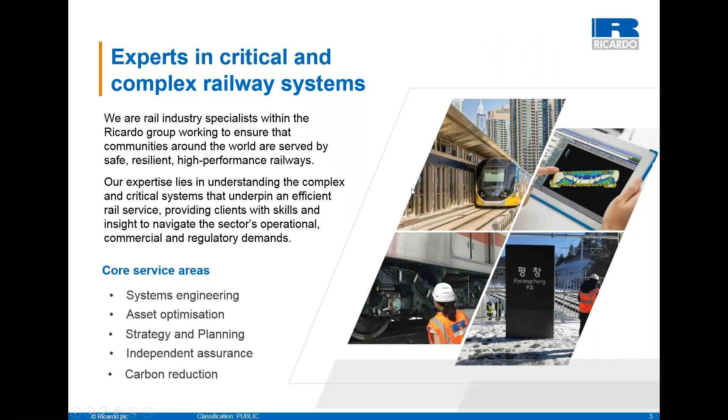So can the negatives outweigh the positives? Couple of quick slides about Ricardo. Experts in critical and complex railway systems and projects across the world.

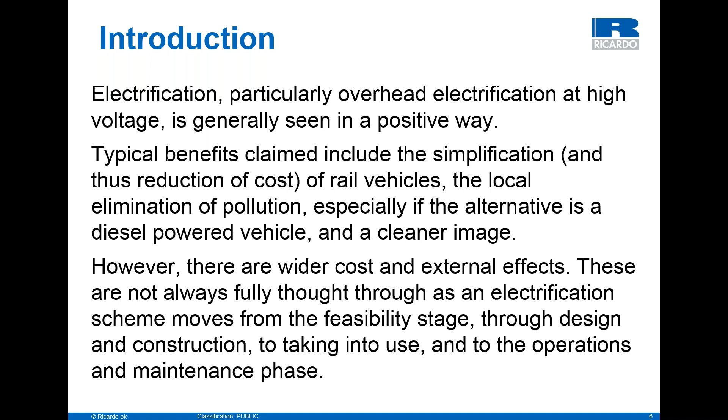However, there are wider cost and external effects. These are not always fully thought through as an electrification scheme moves from the feasibility stage through design and construction to taking into use and to the operations and maintenance phase. So looking first at implementation issues.

Typically, physical implementation requires significant disruption to train services over months, if not years. This can destroy the rail market on the route and thus potentially electrification's own business case. For example, electrification of the Cross-City line in Birmingham required the suspension of evening and weekend services, forcing passengers to use alternative modes of transport.

As the electrification works coincided with a recession, those other modes were not crowded, and there was a degree of modal shift away from the railway that took a long time to recover.

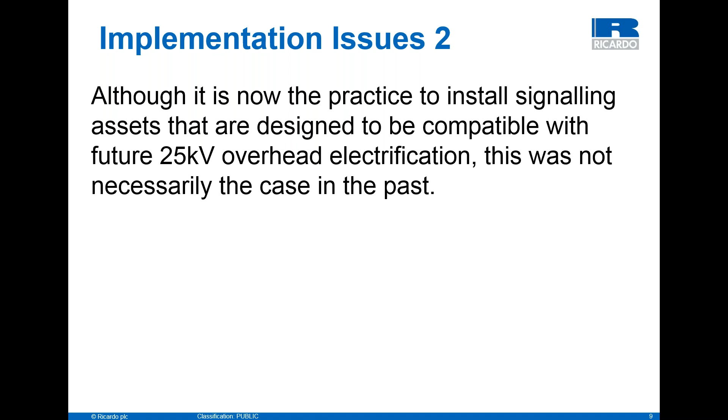Although it is now the practice to install signalling assets that are designed to be compatible with future 25 kV overhead electrification, this was not necessarily the case in the past. Therefore, where electrification does not coincide with resignalling, there can be a significant amount of work for the immunization of the existing signalling, including, in particular, changes to track circuits.

The design life of a bridge is typically of the order of 100 to 120 years. Some forms of bridge, such as brick and masonry arches, can, if the foundations are not disturbed, last much longer. When electrification requires the reconstruction of bridges, it has to be recognized that there is a cost in environmental terms of destroying bridges with decades of remaining life.

There does seem to be some potential for a former practice. The London Brighton and South Coast Railway electrified much of its suburban service in the early years of the 20th century, using a 6.7 kilovolt AC overhead system. To avoid reconstructing certain bridges, there were dead lengths of contact wire.

This concept is now being promoted as an innovation, although recent experience seems limited. The trains could deal with quite a long dead section. Up to 60 metres is recorded in Hamilton Ellis's The London Brighton and South Coast Railway.

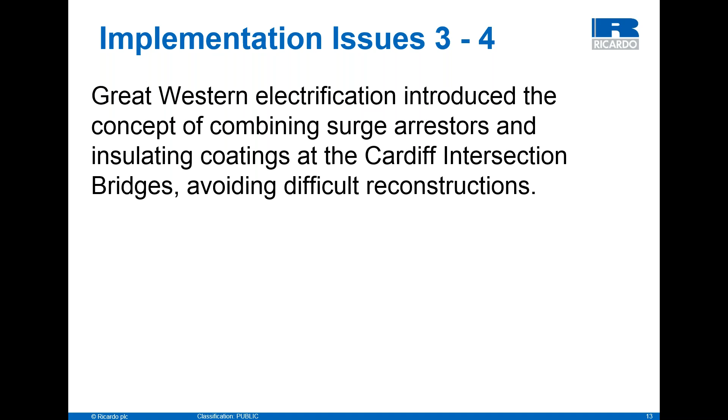Great Western electrification introduced the concept of combining surge arresters and insulating coatings at the Cardiff intersection bridges, avoiding difficult reconstructions. It will be interesting to see how the coatings perform over the years and how often they have to be refreshed. In that context, there is also a need to ensure that the insulating coating or an equivalent remains on the market.

So one alternative to bridge reconstruction is track lowering. Where, as is often the case with older bridges, the abutment design relies on the presence of passive earth pressure on the lower face of the abutment for stability, the abutment needs to be underpinned. Unfortunately, there is usually also a need to modify the drainage to avoid the creation of a sump. And track lowering adversely affects the track top profile.

And on a higher speed line, there is a need for long run-ins and run-outs to comply with the relevant design parameters and to avoid the creation of a permanent speed restriction. This work inevitably requires possessions longer than the maintenance white periods and, not infrequently, temporary speed restrictions whilst the new track profile is created. As with bridges, there is a cost in environmental terms of changing an existing asset configuration with remaining life and generating ballast and track waste.

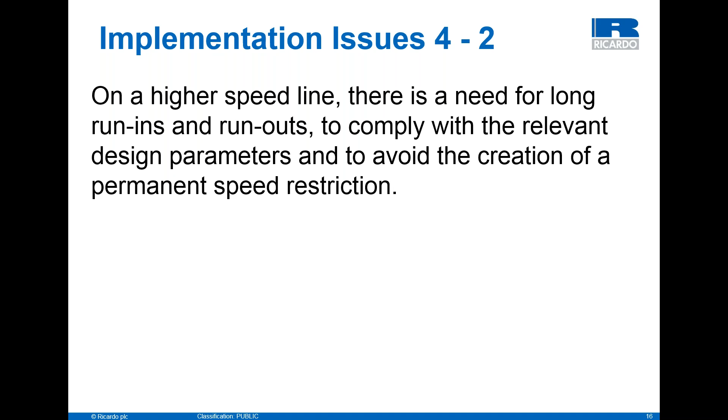A second alternative to bridge reconstruction is the installation of a track slab, common where there is a tunnel or a succession of bridges. It is rare that construction of slab track does not require a blockade of the track, for a period more likely to be measured in weeks rather than days. In addition, the construction of transitions between track slabs and ballasted track can be problematic in terms of quality control.

Electrification also requires a significant earthing and bonding exercise. It is necessary to consider all existing metal structures, including footbridges, line-side fences, station furniture, etc. At metal bridges, the risk of dangerous touch potentials must be eliminated.

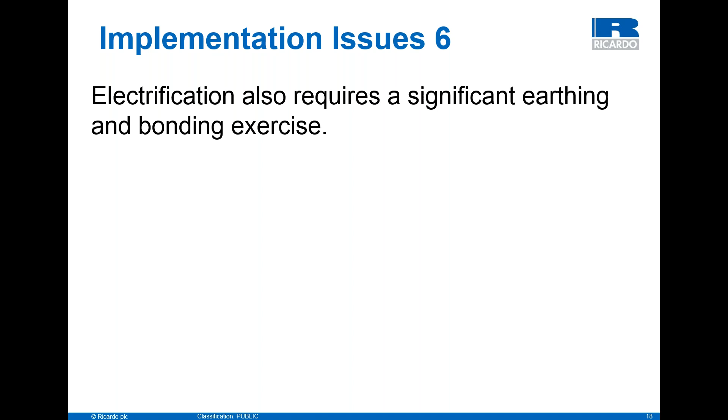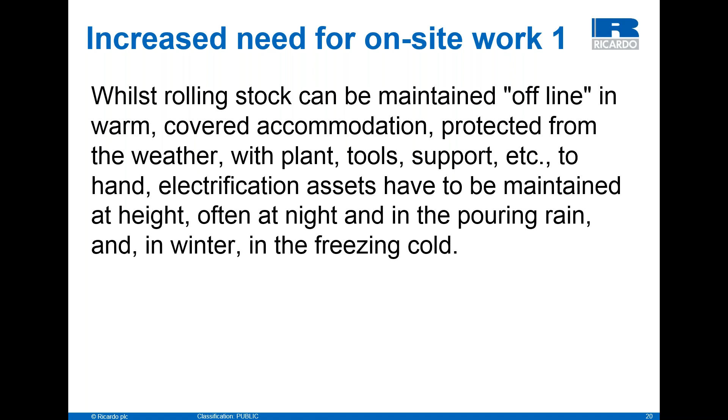There is an increased need for on-site work. Whilst rolling stock can be maintained offline in warm, covered accommodation, protected from the weather, with plant, tools, support, etc. to hand, electrification assets have to be maintained at height, often at night and in the pouring rain, and in winter in the freezing cold. This makes achieving quality difficult and introduces additional safety risks. If problems arise, support is remote.

Although train-mounted remote inspection techniques are now quite sophisticated, there remains a need for some physical inspection, and so the same issues arise as for maintenance. The need to use access platforms, whether train or plant-based, means that there is a need for track access and, of course, for isolations of the electrification system.

And this leads on to the difficulties for other assets. Where the presence of electrification now means that track access for work also requires an electrical isolation, there is a significant reduction in available work time. It is not the isolation itself that takes the time. This is merely a matter of switching. It is the need to secure against re-energization and to apply earths.

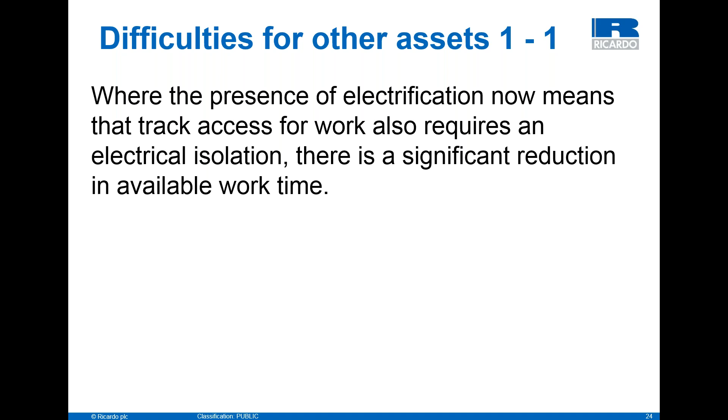There is a common misconception that the requirement to apply earths during an isolation is to deal with the possible presence of induced voltages due to adjacent live electrical equipment. While it is true that such voltages do occur and are sometimes remarkably high, in the thousands of volts, this is not the primary reason for the application of earths.

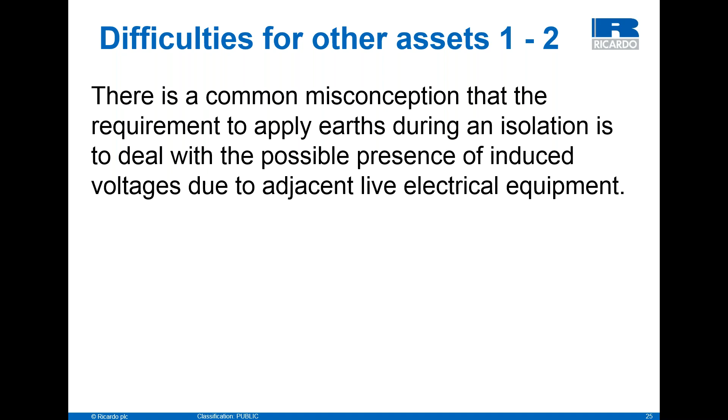The primary function of the earths is to provide the security of the isolation from inadvertent re-energization required by Regulation 13 of the Electricity at Work Regulations, Statutory Instrument 1989/635. Until the earths are applied, the overhead electrification equipment can only be said to have been switched off in compliance with Regulation 12. The requirements of both Regulation 12 and Regulation 13 are absolute. Use of risk assessments to support an as low as reasonably practicable argument is not permitted.

Unless the switched off equipment is secured against inadvertent re-energization, it cannot be said to be isolated, and it would not be appropriate to issue any permit to work. It should be noted that the regulations have not been made as a result of European safety legislation, and that there are different electrical safety requirements in different European countries.

Permanent earths have been tried. They were used on the original British West Coast Main Line electrification in the 1960s. However, many earths were used very rarely and became unreliable due to dirt, corrosion, etc. It was found that a significant ongoing effort was required to ensure that they were 100% effective. Hence, the current practice of designated points to facilitate earth attachments.

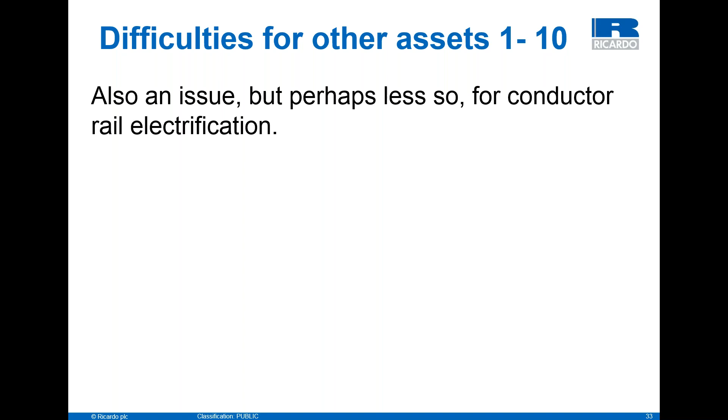As noted earlier, the overhead electrification asset requires track access for inspection and maintenance activities. This means that for those wishing to carry out maintenance and inspection work on other assets, including track, signalling and structures, there is an increased competition for track access to carry out that work.

Where a line is electrified on the overhead system, track must be maintained to tighter tolerances. This is particularly important for cross-level, as the effects at track level are typically multiplied 3 times at contact wire level. Care must also be taken over the maintenance of top, to avoid affecting contact wire gradients, and of alignment. On straight track, the contact wire is arranged in a zigzag pattern to minimize the risk of wearing a groove in the pantograph contact strip.

On curves, the contact wire takes the form of a series of straights. In both situations, the track alignment must be managed to ensure that the pantograph remains in contact with the contact wire. This need to maintain to higher tolerances means that track access for maintenance is required more frequently than would otherwise have been the case. However, on high-speed lines, the need for precise management of track cross-level, top and alignment usually means that the presence of overhead electrification is less of an issue.

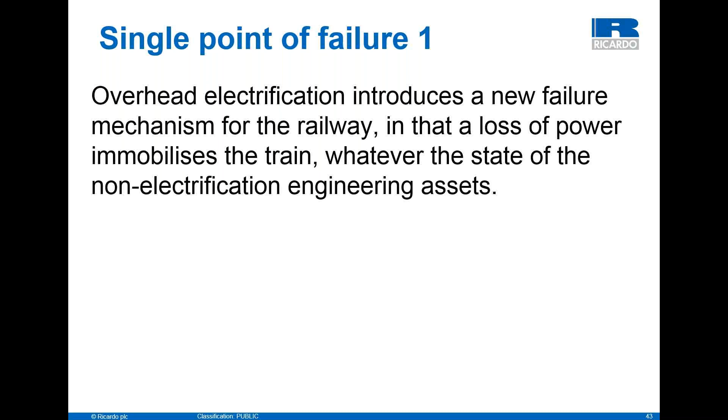We're also considering a single point of failure, and the pertinence of this will become clear right at the end of this presentation. Overhead electrification introduces a new failure mechanism for the railway in that a loss of power immobilizes the train, whatever the state of non-electrification engineering assets. Accordingly, many suggestions for mitigating electrification failure consider how power can be brought to the train. However, a failure of the mechanical electrification system is unlike the other engineering assets. There is essentially a single point of failure which cannot readily be mitigated to allow trains to pass and clear the line.

Concern about this type of failure with a transmitted power system goes back to the earliest days of the railways and the debate amongst the proposers of the Liverpool and Manchester Railway about whether cable haulage or locomotive haulage was the way forward. Similar discussions of principle surrounded the atmospheric system.

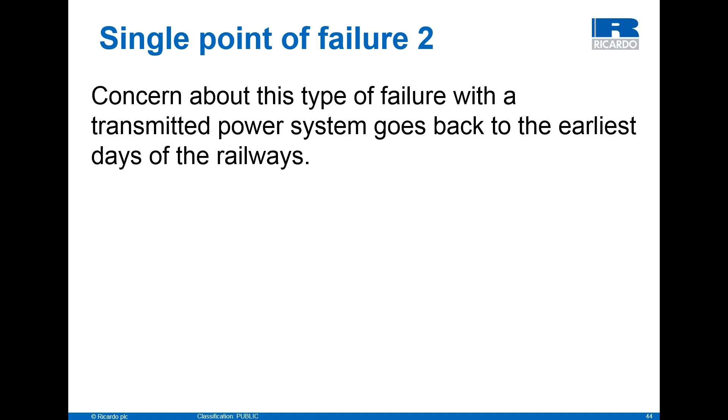In many situations, a failure of the catenary system or a headspan means that the clearance required to pass trains is infringed. This affects non-electrically powered trains as much as electrically powered trains, although the non-electrically powered do have hotel power whilst waiting for the situation to be resolved.

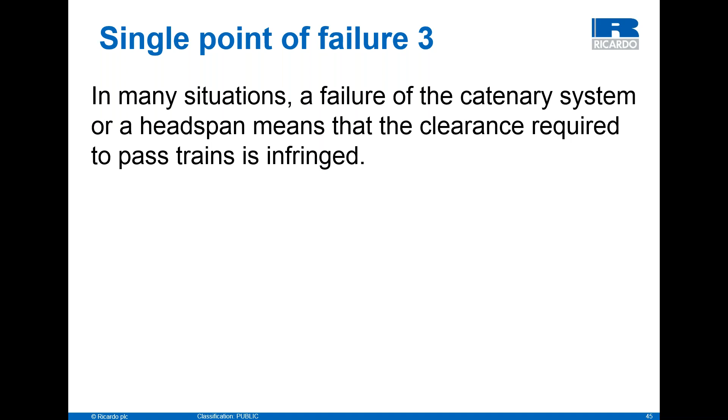Objects blown onto the railway obviously cause the suspension of train services whilst they are removed. However, where the line is electrified, there is an additional likelihood that, for example, plastic sheets will be caught, and then an additional problem in that the removal requires the electrification to be isolated and made safe before the object can be removed, increasing the time required significantly.

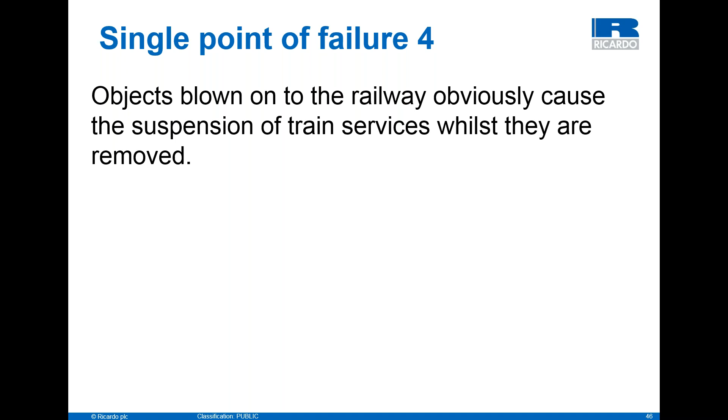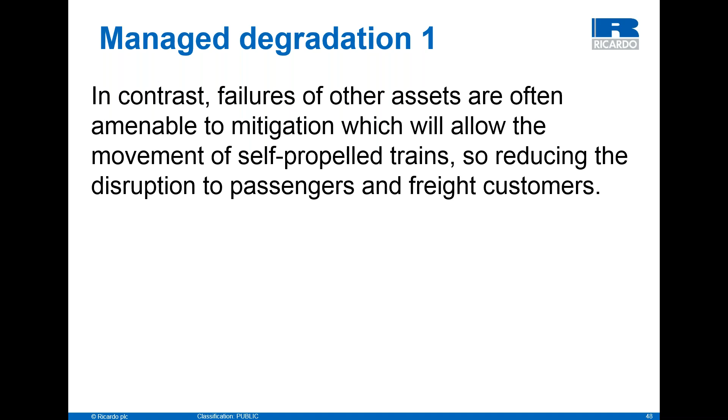Let's compare that with managed degradation. In contrast, failures of other assets are often amenable to mitigation, which will allow the movement of self-propelled trains, so reducing the disruption to passengers and freight customers. If a broken rail is reported, then processes are in place, for example, clamping, which will, in many situations, allow trains to be passed. This may possibly mean the train moving at walking pace and with inspection required after every movement over the break, but at least movement is possible.

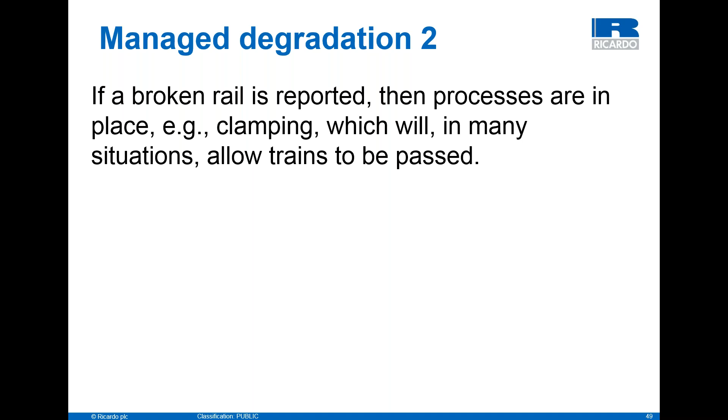Similarly, a developing track cross-level twist or a subsidence can be dealt with by packing the track between trains and, as necessary, allowing movements at walking pace. However, this may not be possible where there is overhead electrification because of the need to maintain the pantograph to contact wire interface within tolerance.

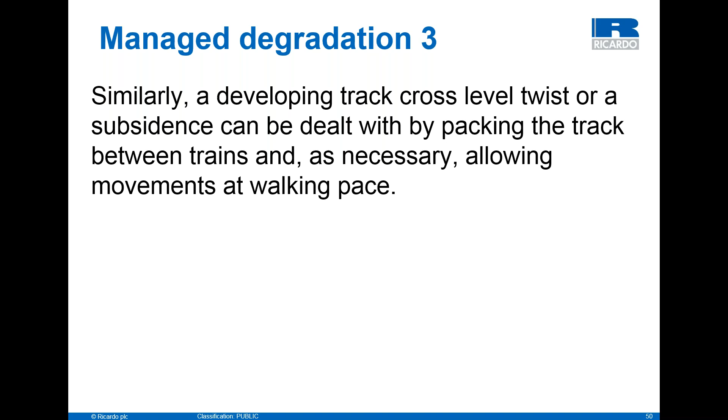Where the track has buckled, it is possible, if space is available, to slue the track to form reverse curves that will allow movements at slow speed. However, again, this may not be possible where there is overhead electrification because of the need to maintain the pantograph to contact wire interface within tolerance.

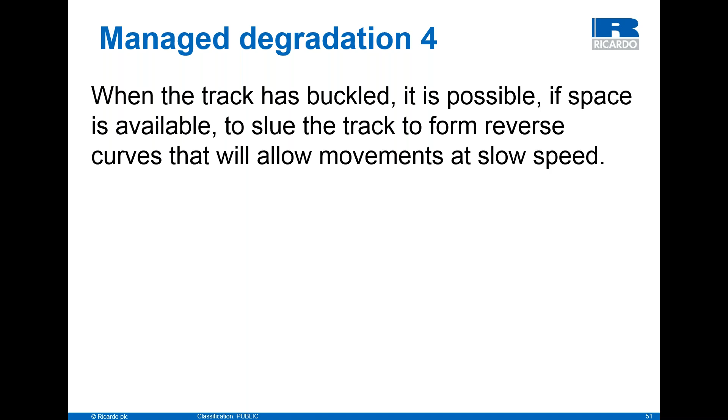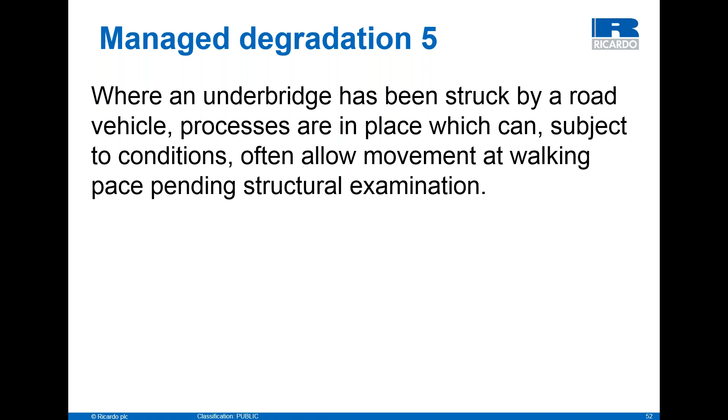Where an underbridge has been struck by a road vehicle, processes are in place which can, subject to conditions, often allow movement at walking pace pending structural examination. Points can fail for many reasons, but it is normally possible for them to be operated manually by staff on site in accordance with the signaller's direction to permit trains to pass.

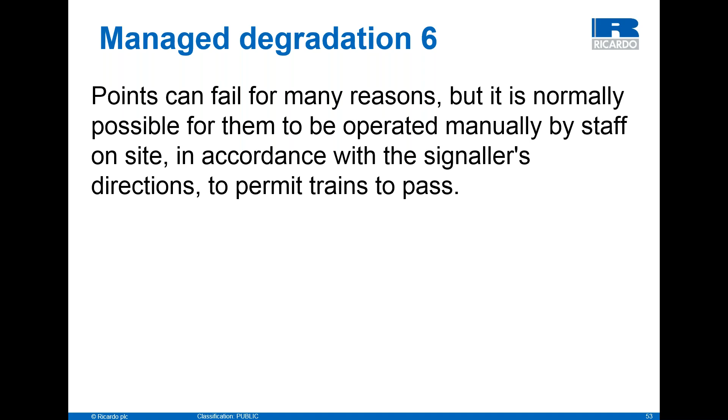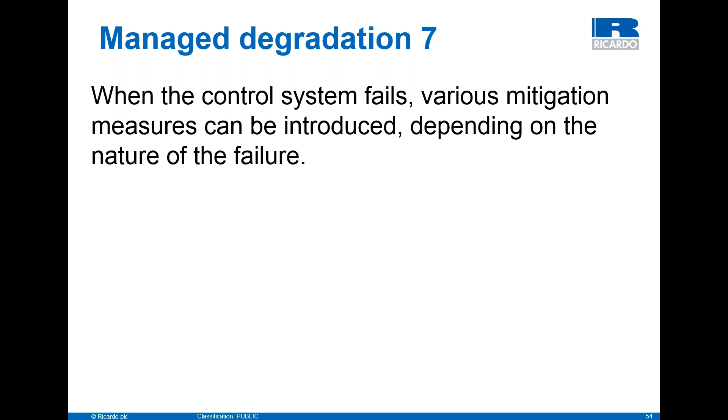When the control system or signalling system fails, various mitigation measures can be introduced depending on the nature of the failure. Movements may be authorized through a section at caution, or station-to-station working may be introduced. If the failure is likely to remain for an extended period, ticket working may be practicable. If the signalling fails on a single line, pilot working is introduced, in which a clearly identified person effectively acts as a human staff.

So, in conclusion to this part of the talk, whilst the introduction of overhead electrification may have its benefits for the operation of the system and for its users, it must never be forgotten that there are significant operational and asset management disbenefits, and these must be carefully considered as part of the commercial analysis of electrification proposals.

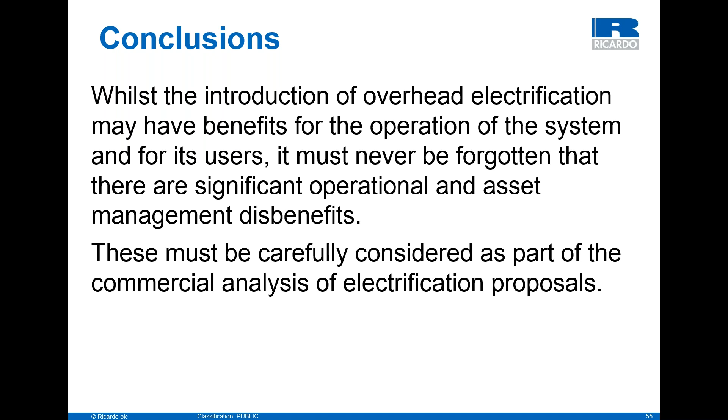So thinking about environmental alternatives: hydrogen engines, which can use modified diesel engines, I'll talk about those on the next slide. Hydrogen fuel cells have some similar issues. Batteries, liquid air, which has barely been touched, and then there's liquefied natural gas as an interim, which again I'll talk about in a second.

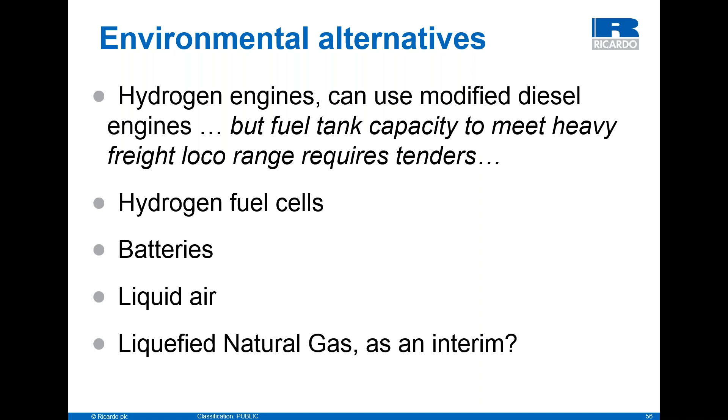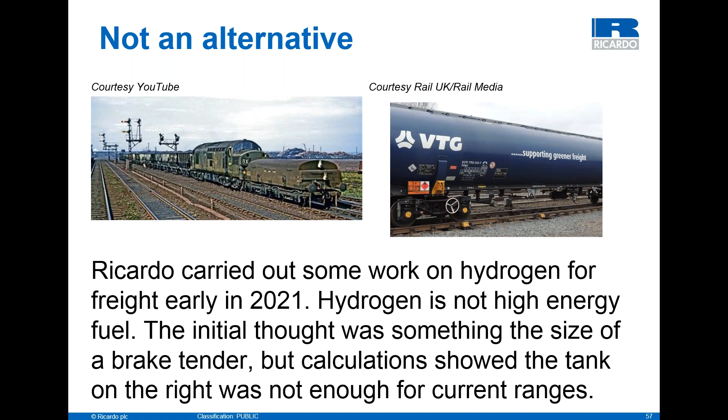Unfortunately, the calculations showed that the tank wagon on the right was nowhere near enough for the current ranges achieved by diesel locos. And obviously you've got all sorts of problems if you've got at least one tank wagon of that size with the locomotive, even though it's powered by hydrogen.

So this means that at every location where you run round trains, you would have to look at the head shunts, look at the traversers, and work out how to extend them without reducing the standage, given we want to try to have trains up to the 750-metre length if we possibly can.

There is a non-environmental alternative. Everybody may well remember the problems with Blackpool and the electrification to get there and how many years that took. Well, following the electrification to Blackpool, I had to travel up there a couple of times. I suspected from my ticket booking that it was a Voyager and not a Pendolino.